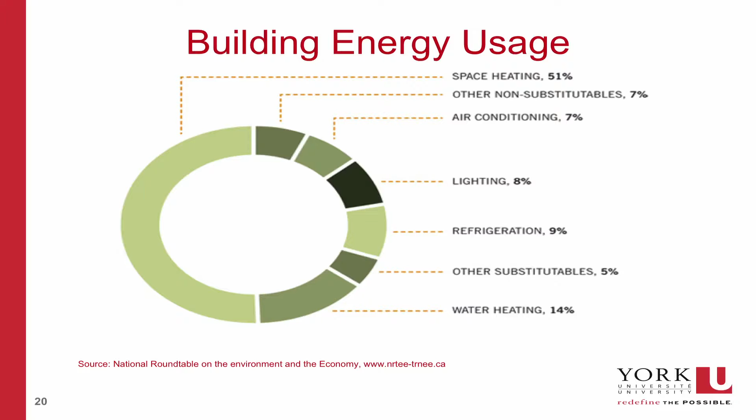So this is just some examples of why we embarked on a $45 million renewal project for energy on the campus. That was the driver for us to think in a much more collaborative, integrated way. When you look at this diagram, a Canadian diagram, it shows that basically space heating uses 51% of the energy used on campus. So if we can reduce that through proper design, planning, operations, and maintenance, we can reduce our overall cost. The university has an operating budget close to $1 billion.

And of course, maintenance doesn't get a fraction of that. So we have to do a lot with less. And how do you do that?

Is by ensuring that the work that you do early is properly integrated and there's proper collaboration. We're communicating all the time.

I often forgot that somebody had to operate and maintain it. But now I've become much more conscious when design teams work with us as to what they do. Why did they put the light 15 meters above the floor that you can't get to? There are spaces on our campus where the light bulbs haven't been changed in 8 or 9 years. So think about that next time you're designing a building.

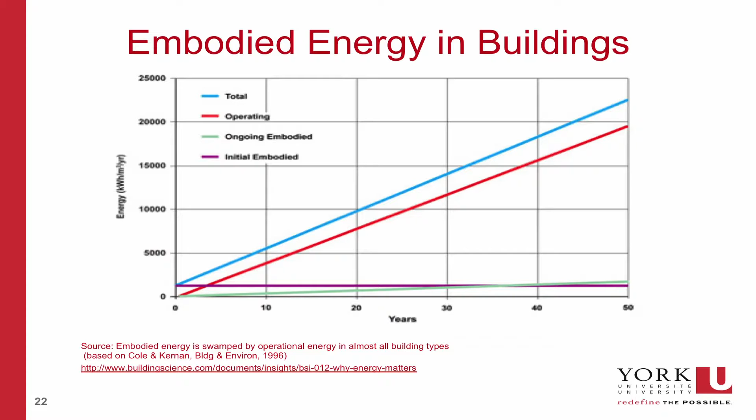This shows the embodied energy over a lifetime, over 50 years. Look at the size and discrepancy from the initial embodied energy to build that facility. This is why I think you have no choice but to proceed to work in a much more integrated approach.

When you reduce my fees, I'm only going to deliver what you pay for. You can't ask me for a Cadillac and pay me like a Toyota Tercel. You just cannot do that. So I think there needs to be a balance in the way we manage our financial resources.

So one of the things we have to do—as an architect I don't accept that, because I know we work very hard for owners and clients to ensure everything is seamless. But we are human, and probably most of these projects never worked in an integrated and collaborative environment.

The statistics show our industry hasn't changed as much as other industries around the world. We're seeing a 15% retraction in terms of skill sets and knowledge. So a traditional process means traditional results. For our engineering friends or civil engineers in the audience, I know this isn't solely your responsibility—it's all our responsibility to ensure these things don't happen.

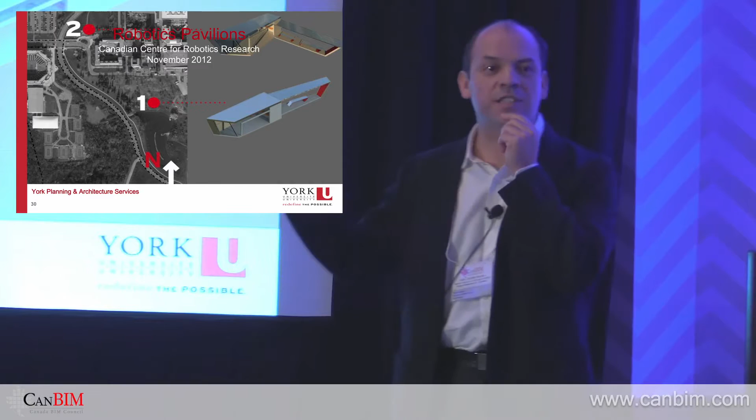It's about 35 or 37 square meters, that's all it is — for those who like Imperial, 400 square feet. Two of these were designed and built in our office. Myself and part of my team designed this. We gave the model to the contractor, who in turn worked with NRB.

NRB is a company that does mobile structures, located near Niagara Falls, Ontario. They do all the kiosks for gas stations, by the way. If you go to their website, this is the featured project now on their site, not the Shell station kiosk — and I'm happy about that.

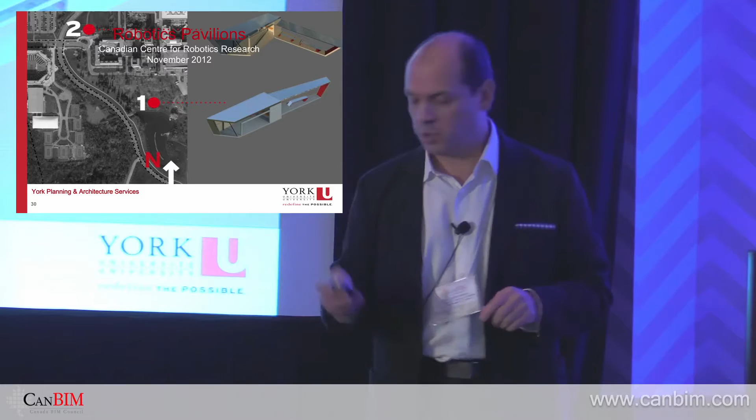We designed it so it can be manipulated on the respective site accordingly. We did the model ourselves, gave it over, and it was then used for fabrication in the plant, from which they fabricated it and brought it to our site in the final state. I was in the plant with my designers for a few meetings at their factory; we looked at the model in the office, then went to see the fabrication in the plant about 15-20 meters away, and we could see the correlation — the folks fabricating the pavilions were actually using the model for that purpose.

So this was our first venture into building information modeling. It got installed in two different locations, and now you have someone contemplating the world here at a beautiful place, and it dual purposes — we designed it as dual purpose, all in BIM. We just won a first prize for innovation from the Modular Building Institute, based in the US but also covering Canada.

And this is what the outcome is. Our life sciences building, which I spoke about, and our other project that we started very early, was an existing facility. So we're talking about new facilities versus this existing facility, made up of 5 buildings, 834,000 square feet, sitting on a podium 5 meters above the ground. Imagine the disconnect between the ground and this roof podium, which has been leaking for a while.

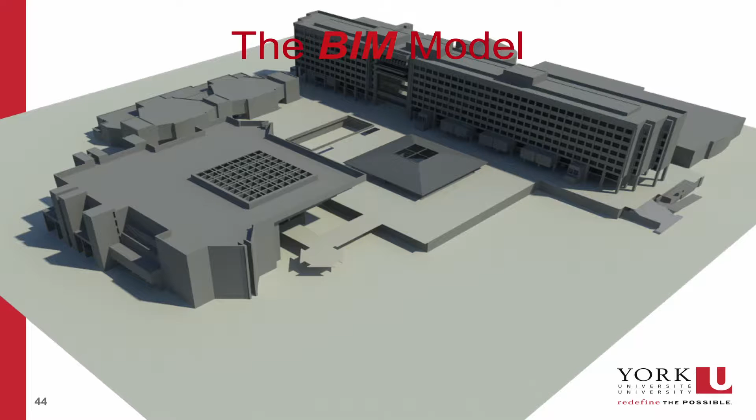The model was created. They looked at options, scenarios of all sorts. They developed a master plan for this area of about $250 million that my vice president almost dropped over. And he said, what do you mean? I don't have $250 million. I said, you're right, Gary, you don't.

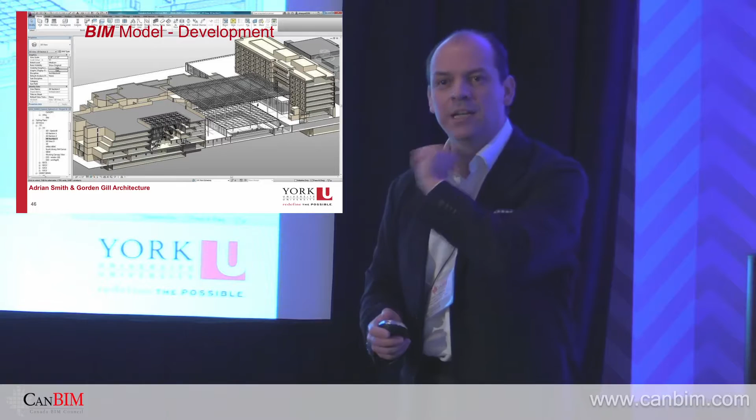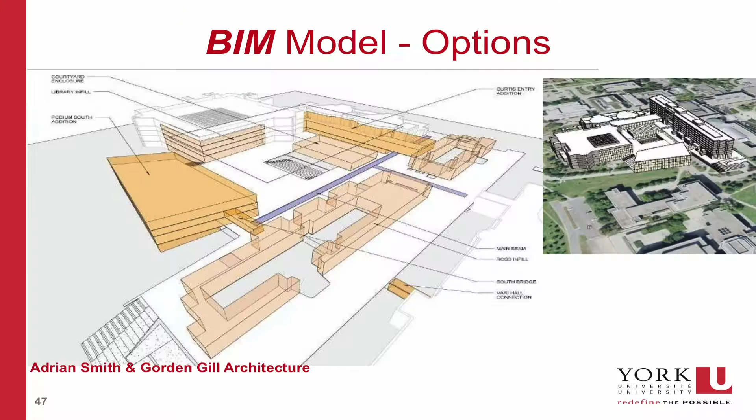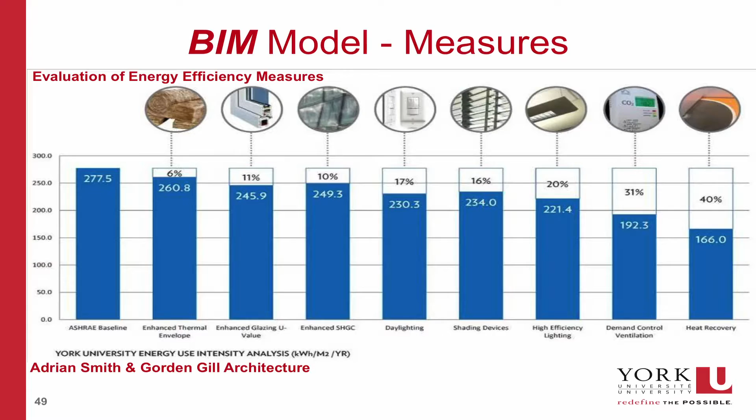The idea is to plan for the future. If we can do an integrated design analysis of this facility, and then phase it in with a $2 million project here, a $5 million project here, and so on, we were able to do that. So this is our analysis. There were numerous options that we looked at for expanding the library and so on in this complex. We looked at the energy options as well in terms of what the scenario would be with various options. We looked at even things as shading, lighting, everything for every design option. Then we were able to say basically a proposition of each option in terms of what the initial investment would be, what the return on investment would be for the university, and so on.

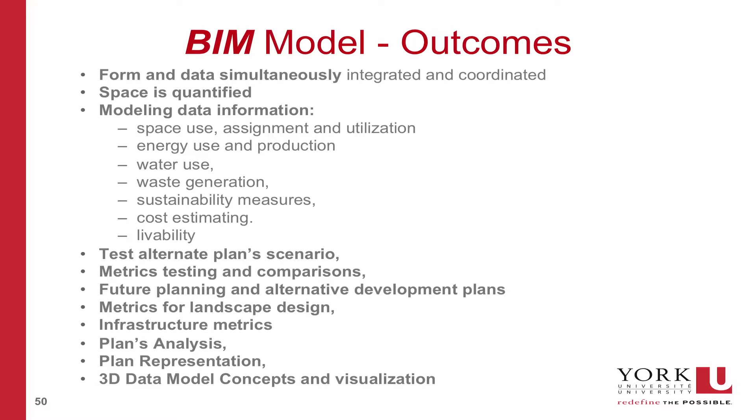That really sang and rang really well with our VP and others, because they recognized that it wasn't just a design or a planning exercise that sits on the shelf. It actually had information that if we change the windows in one of the buildings, the energy reduction is going to go down. And we did this using the BIM information model. As a result, the outcomes were that we tested the scenarios, we looked at future planning, we had metrics for landscaping, infrastructure, and so on. That was the outcome - information that was readily available from the model, and extracted and provided to those who need to make decisions.

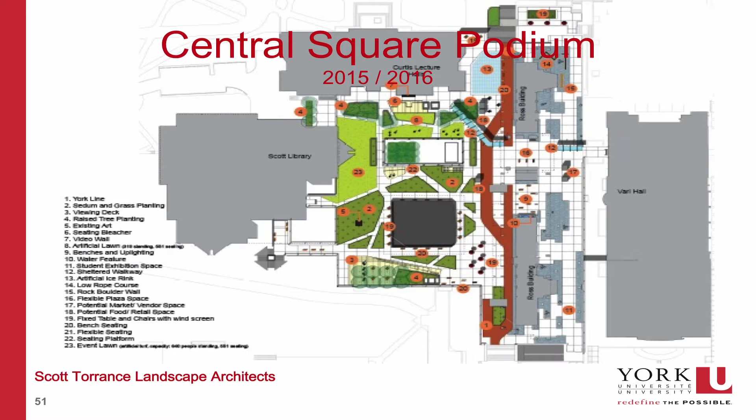As a result of that, we embarked on our first project, a landscape project in BIM. This is about $1.2 million of landscaping with a $5 million renewal of the actual roof. We're actually changing the membrane and updating it. The environment that you saw before, that's what we had to deal with. Now we're going to have an environment that's going to look a bit like this.

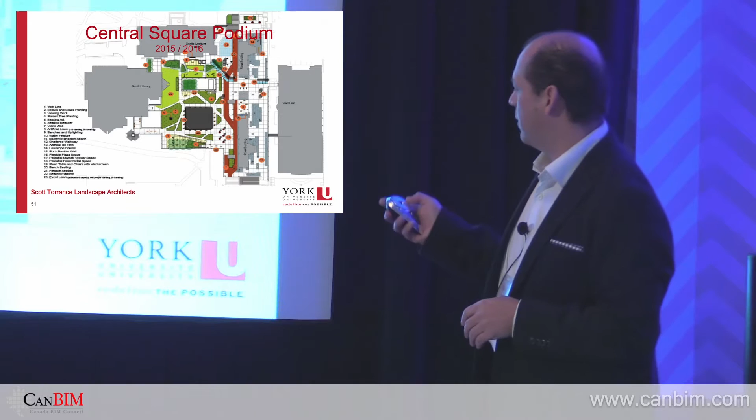I'm going to enjoy being there, and I'm hoping the rest of the university will too. I was told that 50 years ago, people would actually use it to go have their lunch there, and so on. Today, they don't. So we're going to have umbrellas there, all sorts of things, after we've improved the stormwater management issues and dealt with the membrane and the waterproofing that we had to do.

So the old Central Square is going to have a new look and feel using a particular material. We tested all this using our BIM model initially, and that was our first phase project: $6.5 million, of which $1.2 million is landscape. The landscape architects are doing their work in a BIM environment, just so you know. And then, this is what's happening today on our major capital projects.

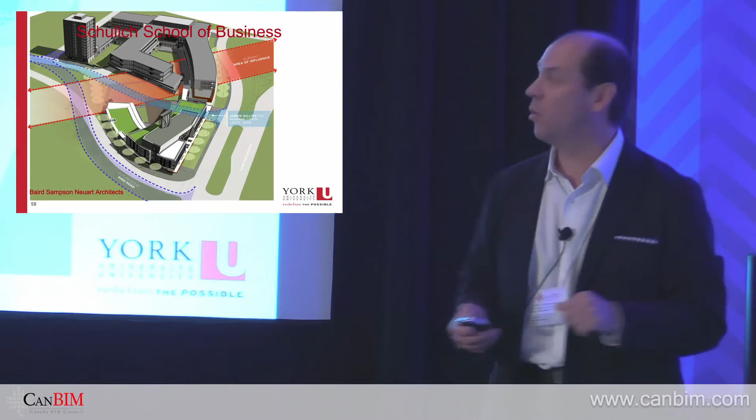So we're using some interesting passive techniques in terms of sustainability. But you can do that because you can test it in a BIM environment first before you actually build it. So this is what it's going to look like.

Advancing forward, our new student center, we'll be the only university in Canada, I believe, or the second one with 2 student centers on campus. $70 million paid by the students. We planned it and conceived it in a BIM environment. So our department tested the site, built a model to test the scale, the size relative to all the buildings around it. We did a costing exercise of it.

After which, it went to the students and said, okay, you guys can afford, with that kind of levy that you have, this much building, and now we're using their metrics that they have for the operations, because the students are going to be responsible for maintaining it. We're taking their basically monthly or annual cost for maintaining and operating. We're using that as the benchmark, so it's being designed to that benchmark. So as soon as the building gets switched on in 2017, 2018, they'll be able to operate it exactly at the level that they need to.

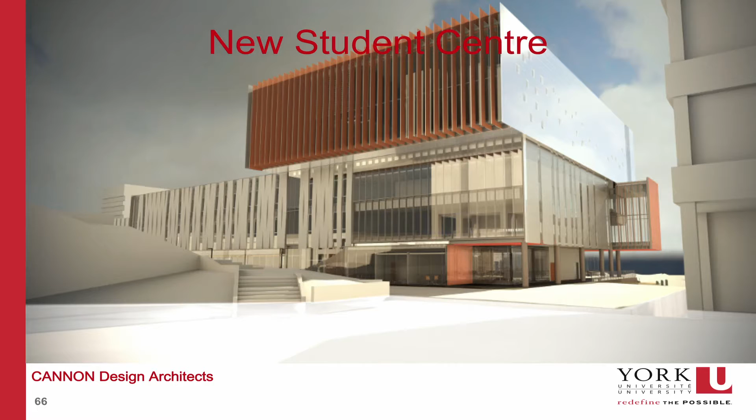So this is what it looks like. This is the area where all the student activity is going to be, on the screen. This is what it looks like from the north. It's near Central Square, the exercise I just showed you just momentarily. Some of the interiors and the landscape design by the landscape architect, designing and integrating with the rest of the team in that environment. So these are their images.

This leads me to, I think, the project that's really culminating for us as an institution, perhaps even maybe as a catalyst for discussion with other owners, other universities and colleges, hospitals, and so on in the province of Ontario and anywhere else for that matter. It's our cloud, which is actually called the Bergeron Center for Engineering Excellence. And this building just opened, basically, just after Labor Day, 105 million, 13 million of equipment.

And this was, if there was a BIM project that next year Best in BIM should win, this is it. Hint, hint. Kidding aside, you can see here, basically the design team's disciplines that needed to use BIM through the life of the project, that's from conception to completion, all the way down to the quantity surveyor.

So I'm regularly asking, is the quantity surveyor using the model to basically review, assess, investigate, analyze, sequencing, whatever, so they can put their numbers together properly, as opposed to the traditional way, because they had a unit cost for a building in the past that they just finished 2 months ago, and therefore they use that. I hate that.

The other thing what we did is, we also did an audit at every phase of completion. So, schematic design, we looked at your model. DD, we looked at your model. CD, 50%, we looked at your model. You don't go past go unless we say so. That's how we approached it. And that kind of pushed the team to really think and collaborate and work together.

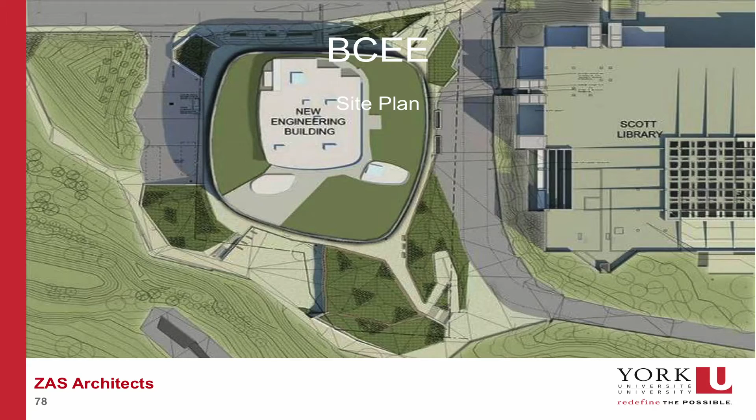So, our cloud sitting on the hill. This is the site for it on our campus—the main library, central square that I spoke about. This is what it looks like, and these are images from the model itself, not renderings from anything else. This is what it looks like today.

As you can see, the panels are still being attached. This picture is from about a week ago, a view from the northeast. This is what it looks like today, as I took this photo. This is the skin design based on the Penrose pattern, developed by a mathematician—you can create an infinite permutation of this pattern with 4 triangles.

It's an amazing system, and I believe credit is due to lots of folks who've done incredible things, like Flynn, who worked really hard with the construction company to actually build a facility like this. I gave him a lot of credit because they worked very closely with the construction manager to make this happen.

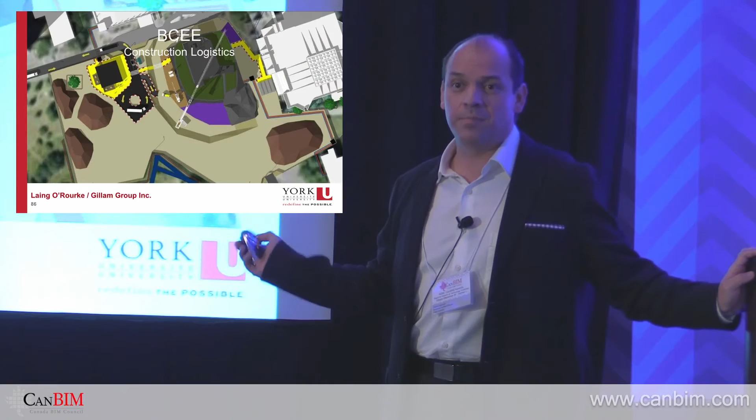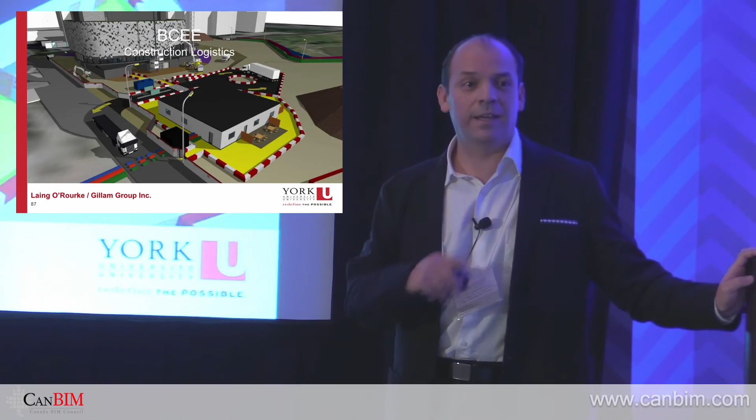It was used throughout logistics, scheduling, all that. This is what I call the BIM command center, where basically the sub-trades would view the model at the beginning of the week, and then they were permitted to go on site. Without looking at the model, they weren't allowed to go onto the construction site, just so you know.

So these are some images, progressions of the skin and how it happened. This is the skin being installed. The backup fabrication, which we just won an award for—a concrete building, steel award from the engineers, the Canadian Engineers Association or something like that—because it created the backup for this incredible facility. These are some images of the interior. As you can see, these pictures are from last week, or late last week.

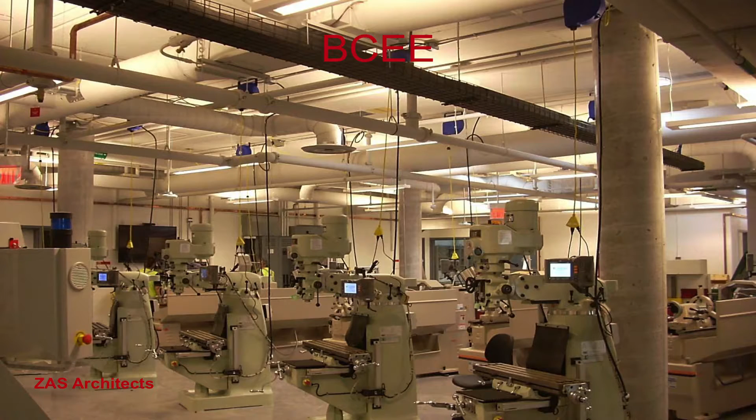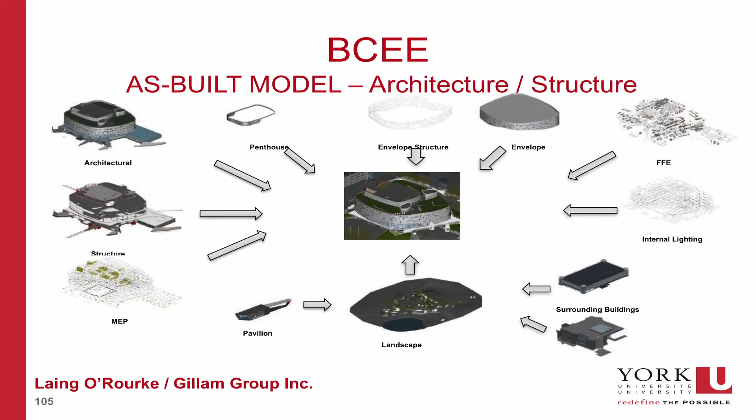And this leads me near the end. I see I have 57 minutes, but I'm going to take an extra minute or two after that to finish something for you guys. This is our model, made up of approximately 80 models, 13 gigabytes if you look at the actual Revit model and all the other software that's been used.

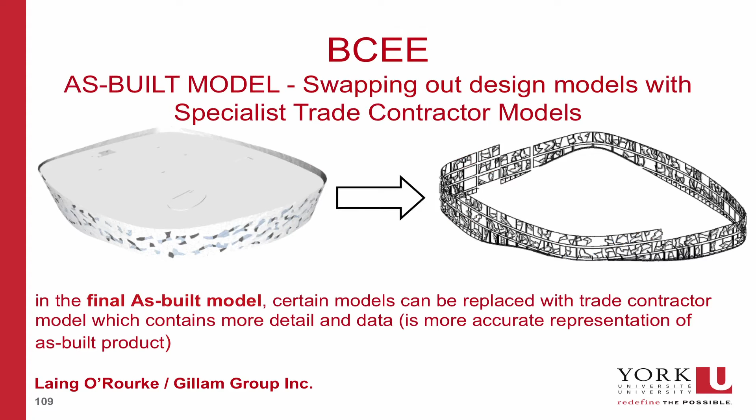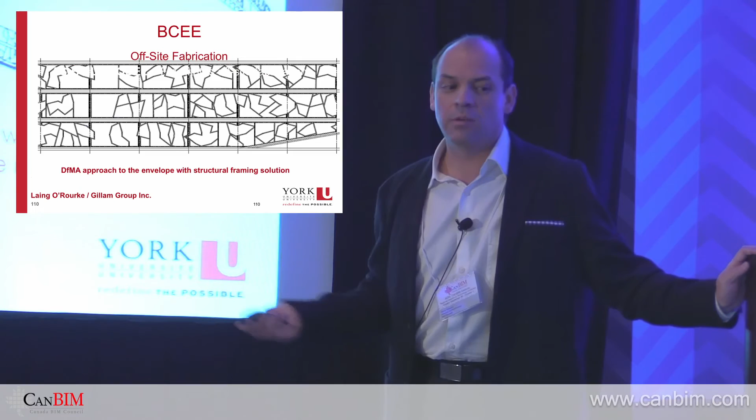But through Navisworks, we'll be able to navigate—if I ever need to replace one of those panels, for whatever reason, we can do it. And we use it for prefabrication.

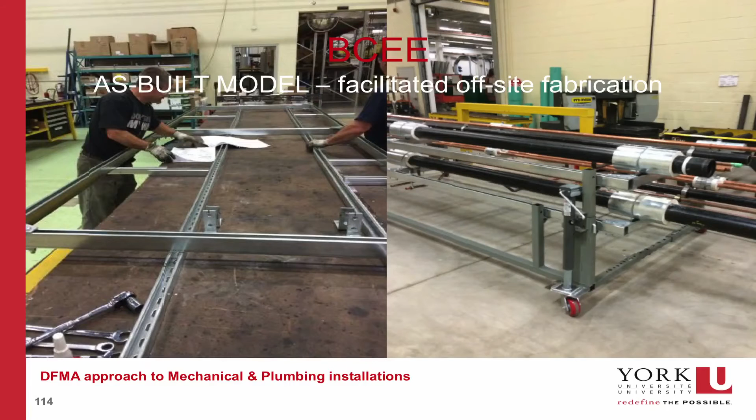Here's the skin under construction, a 3D model of the shop drawings. This is how they came, how they got approved, by the way. From there, they got fabricated—plumbing, electrical, all sorts of things got fabricated off-site. If it wasn't for BIM, there's no way we could have delivered this project planned, designed, constructed, and finished in 3 years.

Just to finish things off, we've incorporated into an as-built model basically information regarding operations and maintenance. Working with them closely, they gave us their asset management SOPs, information, and codes, and we embedded that as part of the model so they can manage that ongoing. Because the idea was that if we're going to plan, design, and construct it, there's no reason why we shouldn't operate in that environment as well. So we decided to incorporate that.

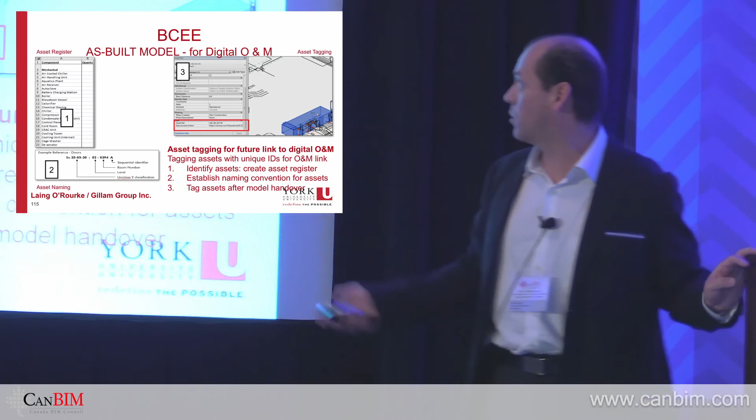So I'm going to finish with about 3 slides, on the benefit of BIM as a business proposition for the owners and anyone else who gets involved in BIM. I'm going to highlight only a few of these—building performance and sustainability.

From an owner's perspective, that's key, ongoing—enhanced branding. You know, if our buildings do not perform, our students will say that to the next student, and the next instructor will find a job at another institution. So it's important that we maintain and operate those buildings.

To finish things off, a few other facilities management opportunities: reliable as-built information that's maintained for perpetuity, which you can extract and draw from. And of course, there's scheduled maintenance that you can integrate and extract information from. So that's where we're headed.

So we talk about the various dimensions of BIM. For us, it's the last two—the 6th dimension, the 7th dimension. Perhaps there's an 8th dimension out there that is important for owners and clients, that all of us should strive for. Thank you.